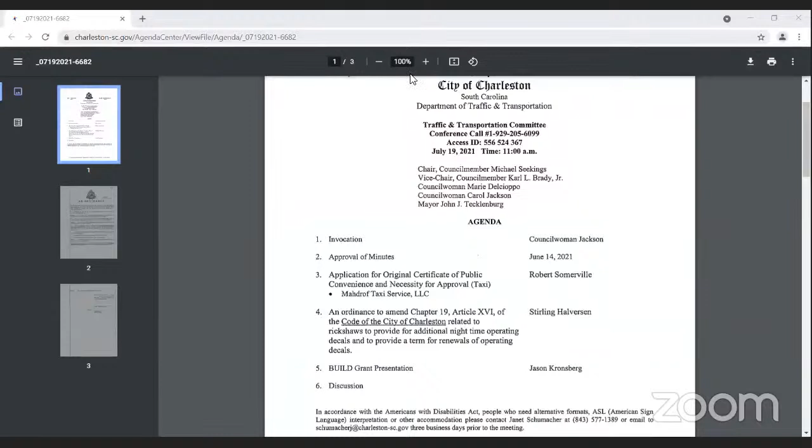All right, it looks like we are live now. Great, and I'm trying to remember because I only heard the second part of your comments.

Are we waiting on the mayor or not waiting on the mayor? As far as I know, he's supposed to be attending. I don't see Rick on here either. Okay, we'll give him one more minute and then we'll get going because everyone's got a busy day.

All right, let's get going and the mayor can catch up. If he... oh, there he is. Here he comes. All right. Hello, Mayor.

Good morning, everybody. Good morning. Hope y'all had a good weekend.

Yes, thank you. All right, we have everybody here, so I'd like to call to order the July 19th, 2021 meeting of the City of Charleston Traffic and Transportation Committee and ask that Councilmember Jackson lead us in an invocation or a moment of silence, please.

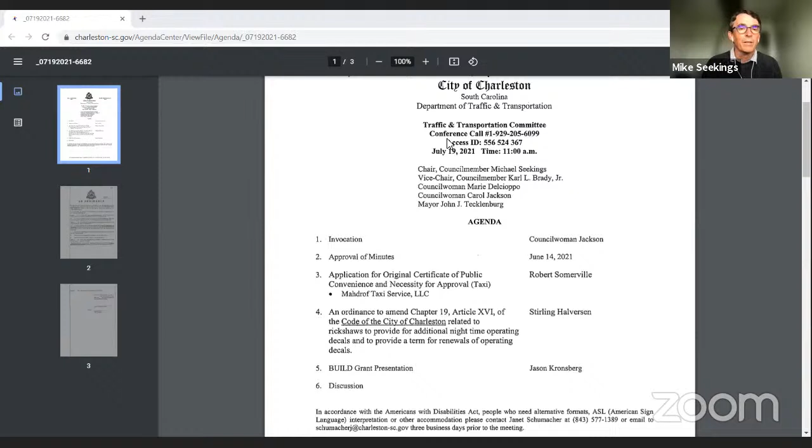Number 5 on our agenda is the build grant presentation. I do see Mr. Kronsberg on my screen. I see Mr. Most. I see Ms. Sharo. All right, here they all come.

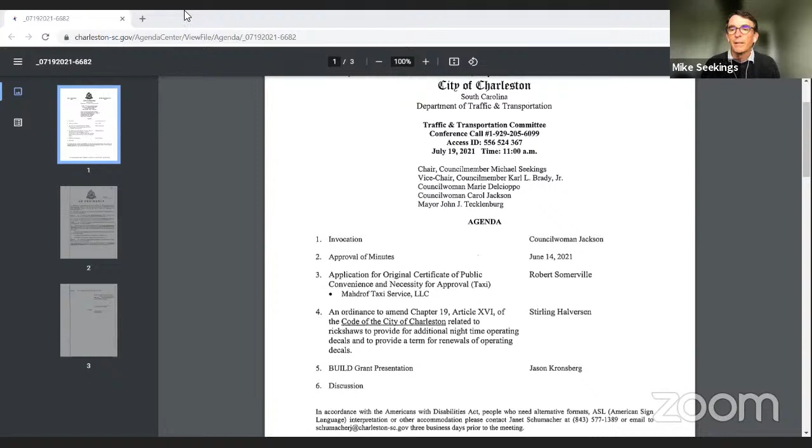Good morning. Who's going to take the lead? Good morning. Jason, do you need me to stop sharing the agenda so that you can share? Yeah. I have a slideshow to share with everyone. So, I see the mayor has his hand up. So before we turn it over to you, Jason, I'm going to call on the mayor.

Thank you, Mr. Chairman. I just wanted to publicly acknowledge the tragic fatality that occurred on the Ashley River Bridge late Saturday night. That's the reason we're doing this, to have safe passage back and forth between the peninsula and West Ashley. Hopefully when this bridge is completed, an incident like that just wouldn't happen again. Of course, we'll have to direct all bicyclists over to the new bridge. We don't know a lot. The incident is under investigation. The young man had a Texas address, and notification has now happened with his family out in Texas. But anyway, I just want to acknowledge that tragic incident, and that's what we're all about, trying to make this a safer place for everybody.

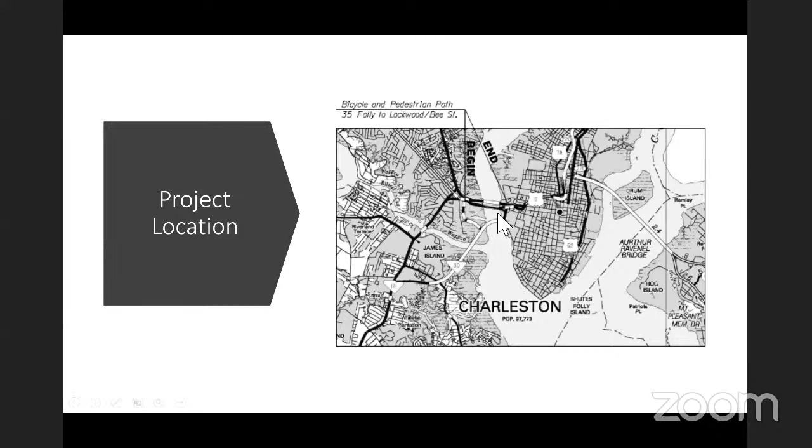You see it here, I'm not sure if you can all see my cursor. It is to the south of the existing Legare Bridge. What we have been doing, working with our federal sponsor, some of this is a bit of a recap, but as you all know, we're a direct recipient of the federal build grant, working with stakeholders, Charleston County, Medical University. HDR is our design build support consultant, and we're working with the FHWA and the SCDOT. They have been unbelievably helpful in guiding us through this process.

A little history of the project. In July 2019, we applied for the grant, for another attempt. We received that grant. November 2019, we were notified of the award, the $18 million grant for the standalone pedestrian bridge. We've hired HDR in September of 2020 to help us through the design build support services, which will end up in an RFP at the end.

And we were notified not too long ago that the federal government, in a fiscal year 2021 Consolidated Appropriations Act, included a provision that reappropriated all of the 2019 build grant funds and extended the obligation date by a year to September '22, due to the COVID-related difficulties in coordinating and getting projects through the federal system. Some of you on the selection committee received notices that those dates had changed, and so here we are.

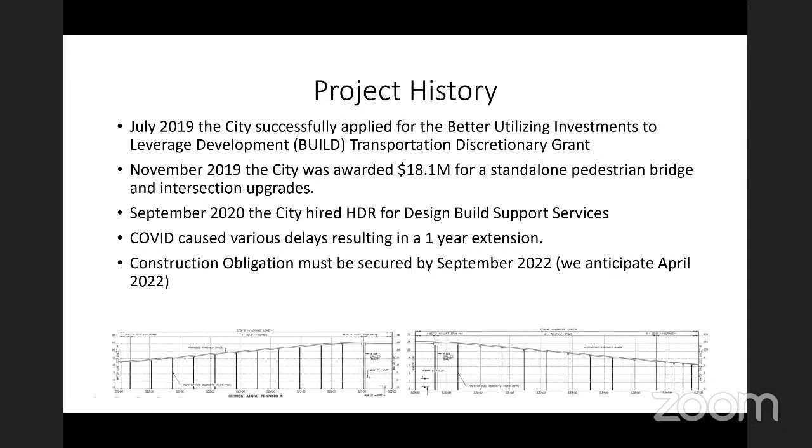The FHWA submitted that grant extension on our behalf, which was awarded. So that initial obligation date changed from September '21 to '22. So we continue to work through the process. The diagram at the bottom of your screen is simply the elevation of the bridge as it crosses the river with the open span in the middle.

What have we been doing? We've been working through the NEPA process, which is an extensive process. NEPA requires all agencies to assess the environmental effects of projects and coordinate throughout multiple agencies.

So what are we doing? I won't read every single one of these, I'm just going to hit some of the highlights and keep going through this as quickly as possible. Please let me know if you have any questions.

We started with our natural resource assessments, going through many survey processes including wetlands delineation, getting those plats approved, doing underwater cultural resource reports and surveys, developing traffic studies, going through a phase 1 environmental assessment process, and having bridge engineers evaluate multiple movable span types to determine what would work best here in Charleston.

We developed conceptual plans, worked through the Coast Guard and the navigational study, went through NOAA to establish and analyze the essential fish habitat, and produced hydrology reports. We coordinated and conducted stakeholder interviews with the Preservation Society and the Historic Charleston Foundation.

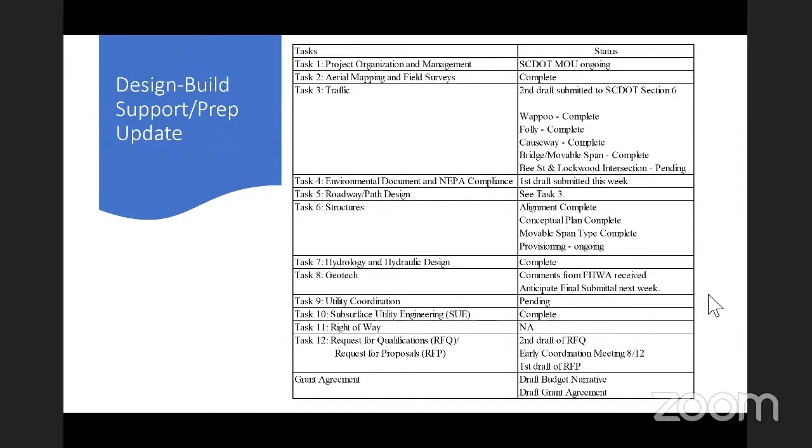So where are we? We're anticipating advertising our request for qualifications on 8/23. In that time, we will receive those design build team qualifications. We'll sit down with our selection committee, and then we'll identify shortlisted teams that are the best teams applied.

Those teams will in turn get the request for proposal. So the shortlisted teams will narrow down to the best teams with the selection committee. They will get the RFP.

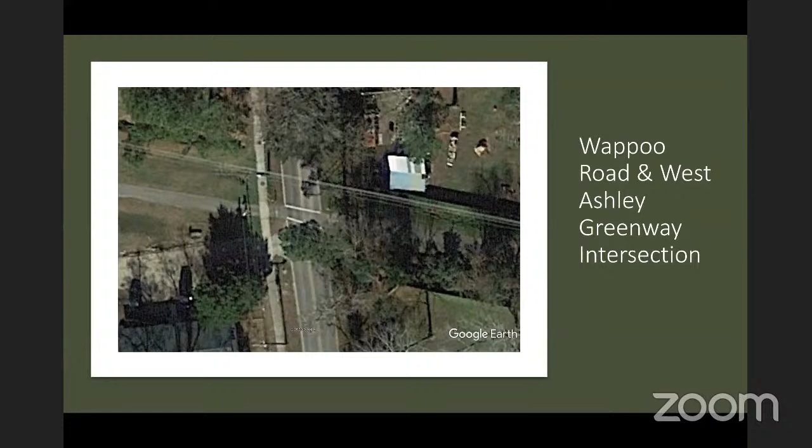So then we go through - I'm going to give you a quick view of the intersections that are improved in this part of the project. This is the Greenway at Wappoo Road. Simply here, a different orientation, but we create a better, safer crossing with better crosswalks and better visual crossings for safety.

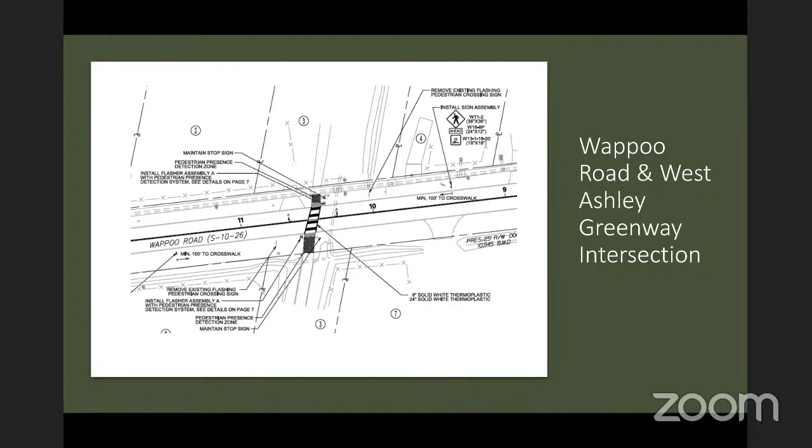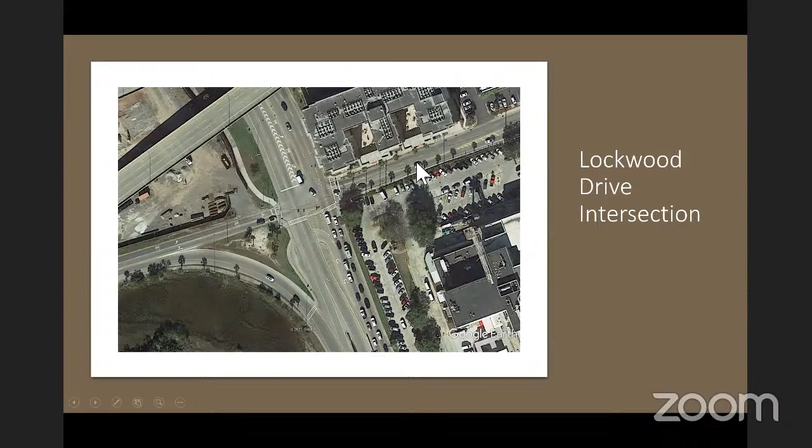Lockwood Drive intersection - this is the existing intersection as you see it. Coming off of the bridge, you come into the peninsula this way, or the medical district to B Street that way. Again, a little bit of a rotated orientation, but the current plans show the existing radius that you see underneath that purple hatching, which is the existing roadway.

The new plans, in order to create the safe crossing into the medical district, will tighten that radius up a bit, giving a little bit more gathering space at the intersection for bikes and peds to get across the Lockwood intersection into the medical district.

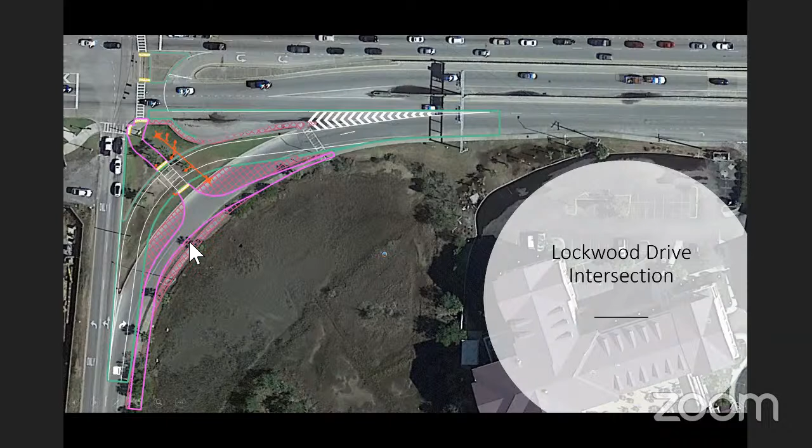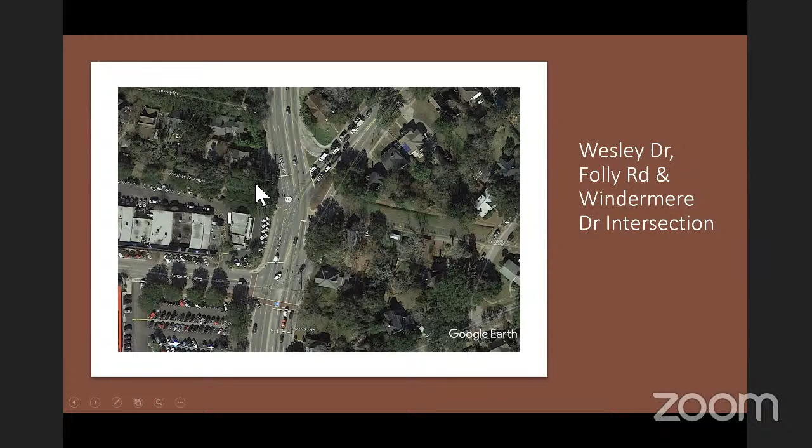As well as continuing on the sidewalk here towards the peninsula, the Wesley Drive, Folly Road, Windermere intersection - so the Greenway comes across here, a little bit of a different orientation. Instead of coming - right now you have to come across Windermere Drive, crossing the crosswalk around.

So our goal is to get more of a direct connection from the Greenway at the top of your screen, across Folly and Wesley to this next median, and then directly across to the Greenway. Those coordinations are ongoing with the Department of Transportation, and we're hopeful to get that more direct connection.

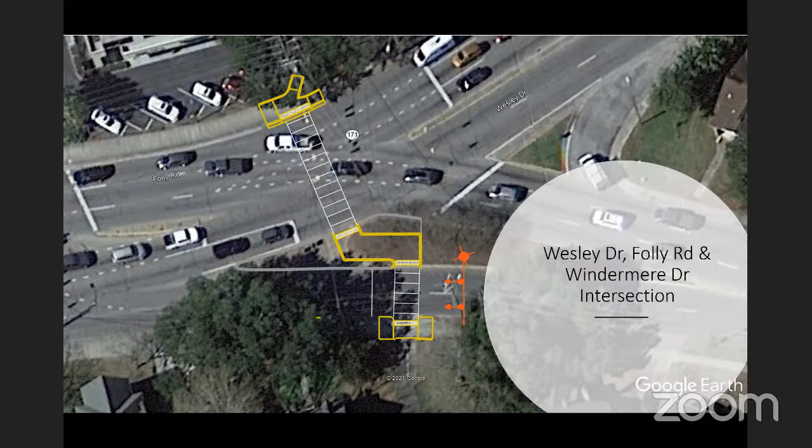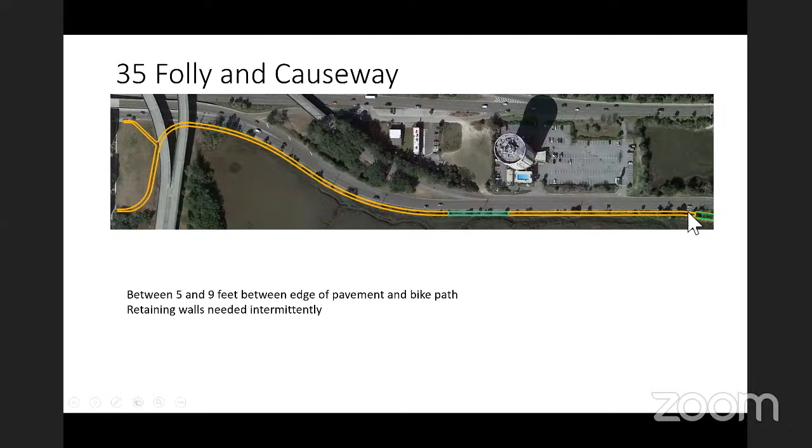And then as you pass by the Round Holiday Inn, you get to the base of the bridge where you veer off into the proper bridge section of the project. You will see here the current alignment with some overlooks on each side of the movable span. This is the movable span, and the channel lines up with the existing channel.

This shows that bobtail swing, which is a single pivot point, rotates to the bottom to open that channel to boat traffic, and then it would close back there. Continuing on across the river, we dovetail down a little bit closer to the bridge to get back on the at-grade

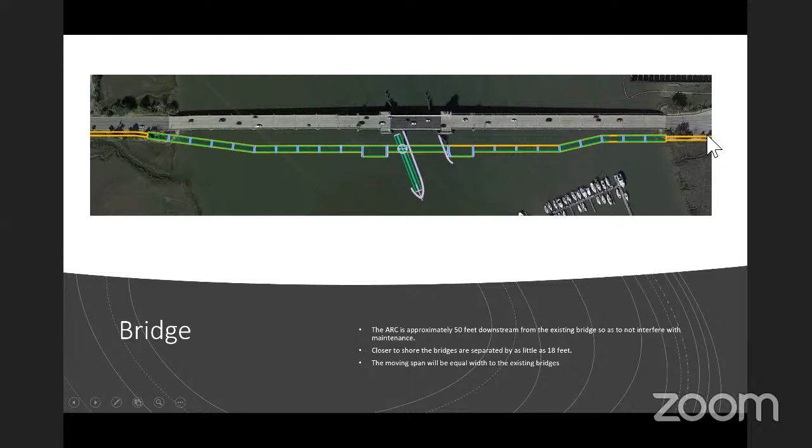location of the pathway. What does the movable span look like? Currently, based on our engineer's evaluation, the bobtail swing is what you see here. Bobtail swing is a single pylon with engines inside of this.

This is where it rotates. It's got a stay cable suspension type engineering. So you have the concrete pylon, which will be about 60 feet tall, with 20-foot clearance for Coast Guard requirements. And then as you're coming along the span, it'll look somewhat like a wishbone, if you will.

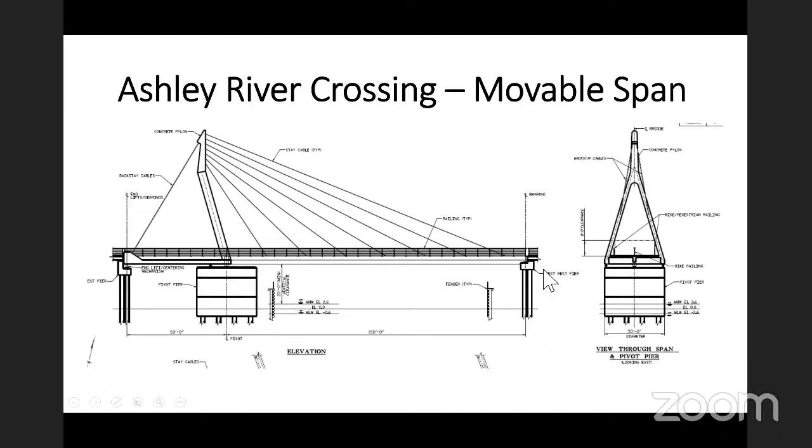This is the view looking through the span, 18-foot clear along the approaches to the span, a little bit wider in the span itself. And then I end up with a graphic rendering of what that bobtail swing span would look like.

So this is the current plan to bridge the gap, if you will. And at the end of this first contract, we will have 30% drawings, which will be issued to the design build contracting team to take us through fruition of this project.

So that's a lot of information I've given to everyone, and hopefully not too long of a period of time. We have Terry Shiro and Michael Darby on the line for any additional detailed questions you may have. So I would open the floor to anyone for questions or comments.

Well, first off, thank you, Jason, very much for that. Just really quickly, will you comment to the committee before there's any questions about the reaction of the different stakeholders as you've shown them this? I think it's important that they get a sense of what the reaction has been out there as you've shown it in a limited way to some of the public.

Sure. So we met with Historic Charleston Foundation and the Preservation Society, and they were in full support. They really liked the renderings, and liked the style and design of the bridge. They've submitted letters of support for our process with the State Historic Preservation Office.

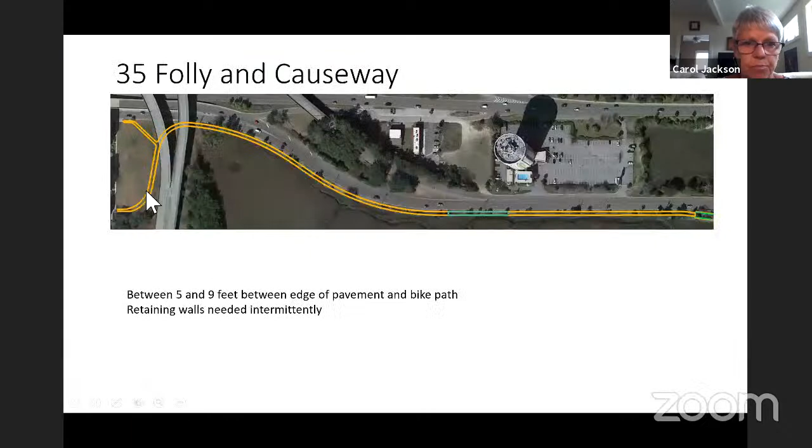So they were always championing what they called complementary contrast. I think this is a real sweet spot of meeting that objective — to make it beautiful, but not try to recreate any of the features of the other two companion bridges.

Will there be some sort of show and tell for the Bike Ped Advisory Committee soon, or what's the plan for that, Jason? We can. We've been working with Katie and Charleston Moves the entire time. She's been part of some of these stakeholder groups, but we can certainly provide another coordination meeting if that's what we want.

Yeah, we'll have a meeting of that committee in the fall, and we'll definitely get a brief update. That group is just such a booster community — you really want to keep them in the loop. So thank you very much.

Okay, Mayor Tecklenburg, I see you have your hand up. Yes, sir, thank you, Mr. Chairman. And I'm going to ask Jason if he would explain a little bit about our requirements with the Federal Highway Administration regarding funding.

That's relevant because just tomorrow afternoon at Ways and Means, we'll be asking y'all to approve a letter for me to send to the Federal Highway Administration. So Jason, if you bring everybody up to date on that, and then maybe I'll follow up with another comment. Certainly.